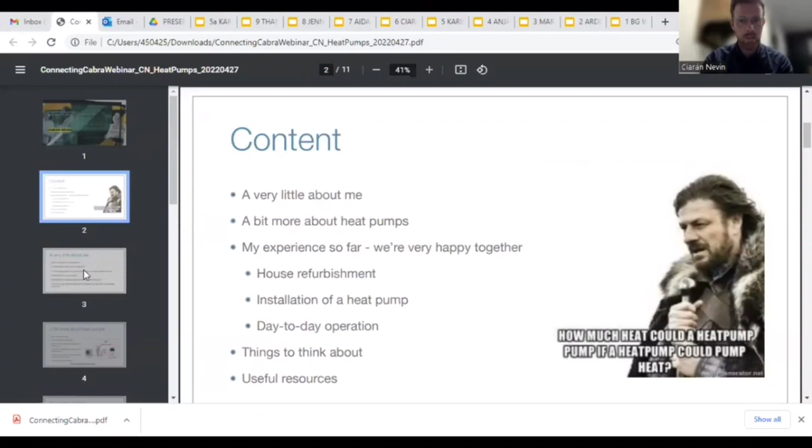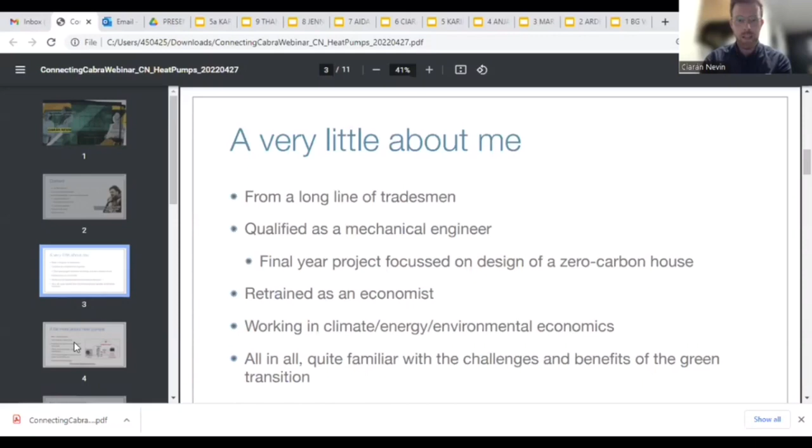Yeah, so just to say, as I said, I worked as an engineer and more recently as an economist, focusing on efficiency and energy, etc. So my finger will be relatively on the pulse in this whole area. And even with that, I suppose the point is that I still would do things differently if I was doing the house all over again. So talk to as many people as you can and get as much advice as you can before you set out on any project, I suppose is the first thing I'd say.

So a bit about heat pumps. I think the first thing to understand about a heat pump is that it's not new technology. Your fridge is a heat pump. What your fridge is doing is it's taking heat out of the box that is your fridge, and it's heating the room through the fins that are on the back of the fridge. So a heat pump is working in the opposite direction, essentially, by taking the heat from outside and bringing it inside. And that can be hard for people to get their heads around.

Some people either think that essentially all you're doing is using electricity to heat your home, and others assume that there's some other fuel that's involved. But it's really important to understand that the electricity is only working the mechanics of the system. It's only moving the fluid around through the system and moving the fan. But the heat is actually energy that's been taken from the ambient air outside.

And that technology, as I said, my dad was a builder. He's retired now, but would have been quite innovative in his time. One of the first to use timber frame homes in Ireland, for example. And yet, when he was on site and I was away for a few days, he asked my electrician to wire up the house for a boiler because he had no faith that this heat pump would work with an Irish winter. And so when I got back, I noticed that it was wired up for a boiler and a heat pump. I've never needed the boiler since, just to say. But I guess that's just the point. This technology is a little more difficult for people to get their heads around, but it does work.

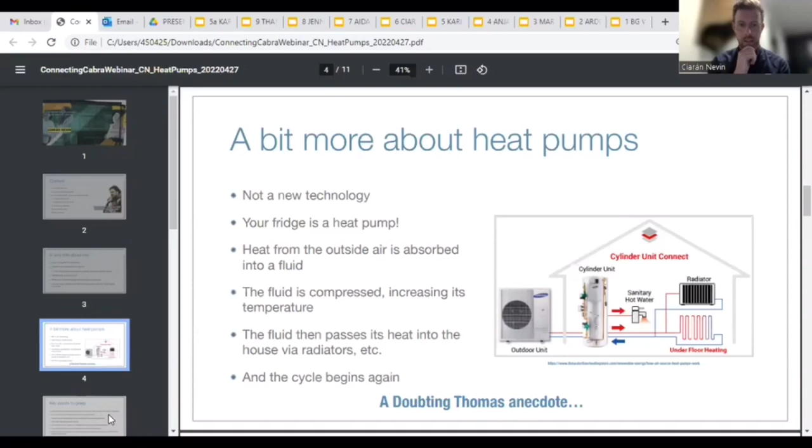So we can move on to the next slide. Some key points to grasp about it. Yeah, so it's not simply using electricity. So don't confuse this with electric radiators or storage heaters or anything like that. The notion behind the heat pump is that for the electricity you put in, say you use 1 kilowatt to run the heat pump, you'll usually get between 2 and 4 kilowatts of heat for that input. So you're getting more out than you're putting in because you're taking that heat out of the ambient air.

They work at lower temperatures than gas or oil boilers. So this means that if you're using them with radiators, for example, the radiators will never be hot to touch. And this also means that they're heating a home over a much longer period. So the system is running for a long period, and it holds the home at a steady temperature.

So that's why insulation is so important, because if your home is leaking a lot of heat out through its walls or through the roof, etc., the heat pump essentially can never catch up. So it's constantly running, and that's where people end up with enormous electricity bills from trying to run these systems.

So really what you should be doing is allowing it to heat your home slowly and steadily. You use it without a timer, so it's not like typical central heating where you put on the heating for an hour in the morning and an hour in the evening and then suffer through the gaps. Here you leave it on, you leave the system basically armed, and it will turn on and off based on the change in temperature in the house.

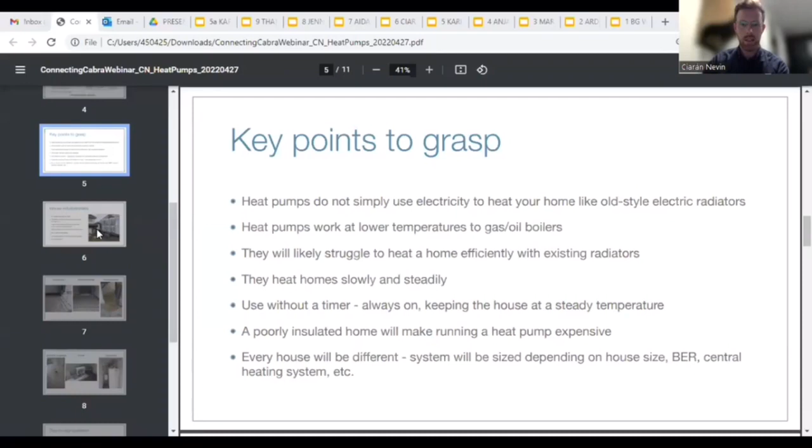Here we go. So my house was built in 1935, precast concrete slabs. The house was extremely cold and damp. The suspended wooden floors were rotten on the ground floor. Single glazed wooden windows, they were falling apart. Not a stitch of insulation anywhere. It was an F-rated home, and so complete gutting was required.

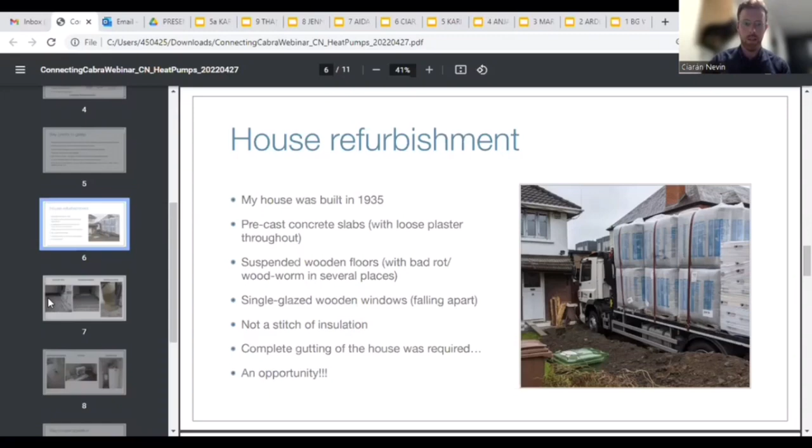And because of the extent of the work that was required, for example, the floors being rotten and having to be replaced on the ground floor meant that was an opportunity to put in underfloor heating. And when you can use underfloor heating with the heat pump, it's particularly efficient because essentially your whole ground floor becomes a radiator, releasing at a low temperature a nice steady heat, which makes running a heat pump very efficient. So I just have some photos to show exactly what goes on there.

I think one of the previous speakers, might have been Maria, mentioned that she had suspended wooden floors on the ground floor and that they were drafty. So when you pull up those wooden floors, there's a cavity. In my case, it was almost half a meter of a gap down to another concrete floor. And so I filled that with hardcore and then put down 100 mil of insulation, which is what you can see on the left. And then after that, the underfloor heating pipes are laid out. So that's what forms the large radiator.

And then a new floor is poured. And this stuff looks like mushroom soup. It sets within a few hours, but it takes weeks to dry. So you're talking about a huge job to do something like this. This isn't the sort of thing you can do while you're living in the house. But it is what makes a heat pump particularly efficient to use if you can do it.

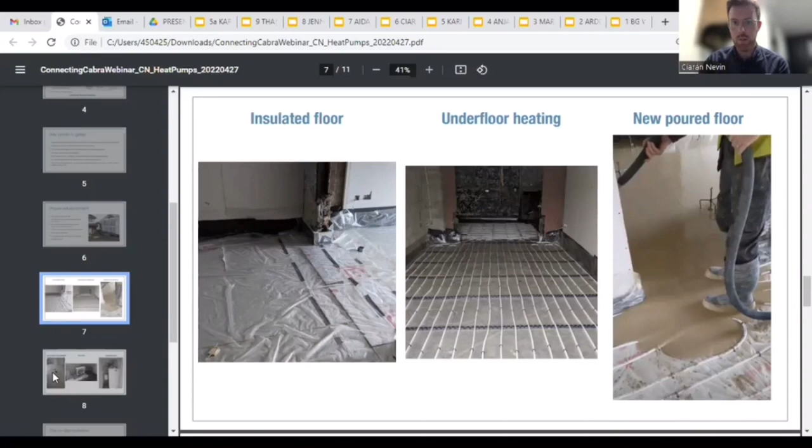So then another consideration is if you're using underfloor heating, for example, it doesn't make sense to go and put wooden floors down on top of that, because the wood actually insulates the floor again and keeps the heat out. It keeps the heat from transferring into the room.

But what I will say is that the cold air that comes out of it is absolutely freezing. And so you don't want that thing pointing at your back door, for example, where every time you have to go out, you're getting blasted with cold air. So that's just something to consider.

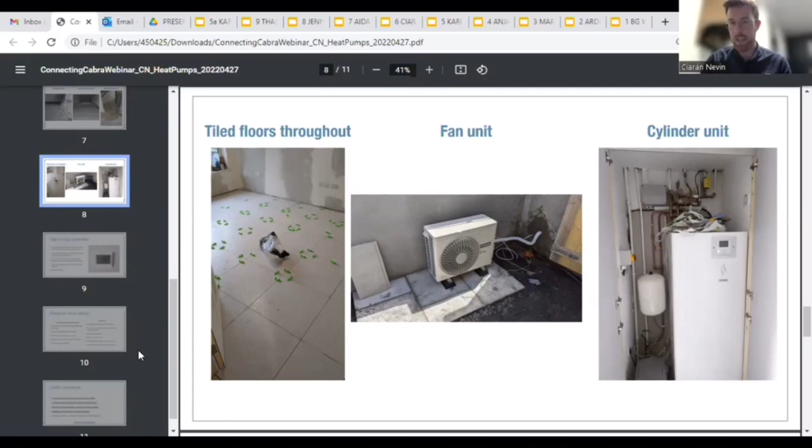And then inside there's a cylinder unit. So this is the equivalent to what would have been an old style hot press. So it's about the size of a fridge freezer there, and that's where your cylinder is within that unit, and all of that is managed by the system itself. So I haven't adjusted the heating controls since this went in almost a year ago now. It just runs by itself and manages everything.

So day-to-day operation,

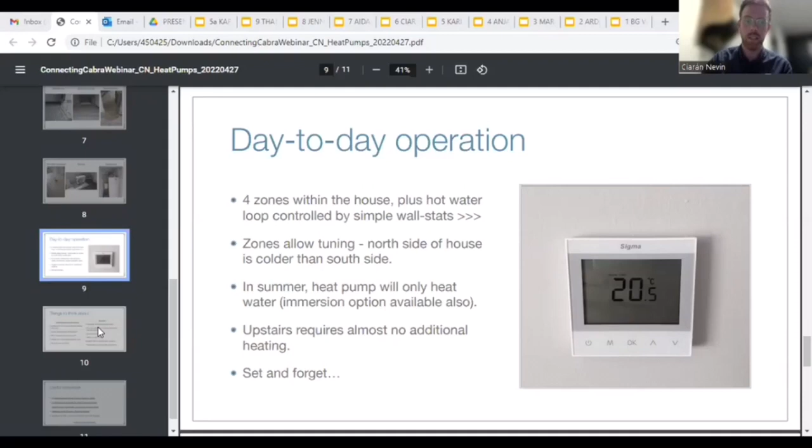So when you have underfloor heating, for example, if you have the night rate electricity, you can actually run that to heat your home through the night, to heat the floor through the night, and the floor will actually give off that heat through the day, much like a storage heater would have done in the past. So I can move on from that.

And finally, there's just a few links there that I've included, but basically the SEAI, Electric Ireland, and YouTube is full of videos about heat pumps. You'll knock yourself out better than any Netflix.

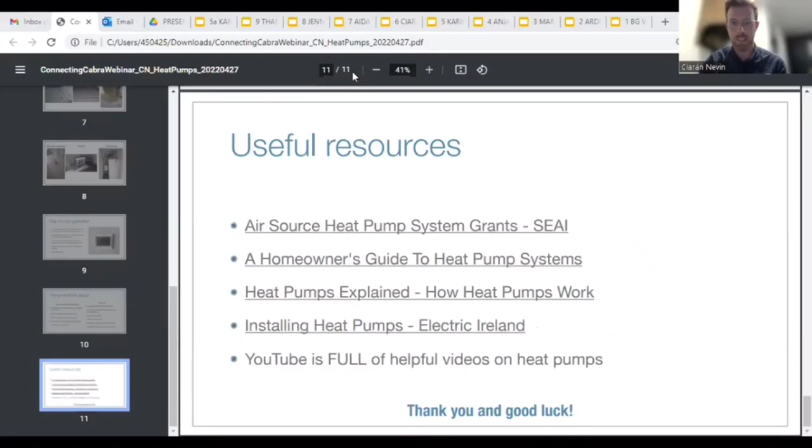So that's really it, and happy to take any questions later on. Cool. That's brilliant. Thanks.